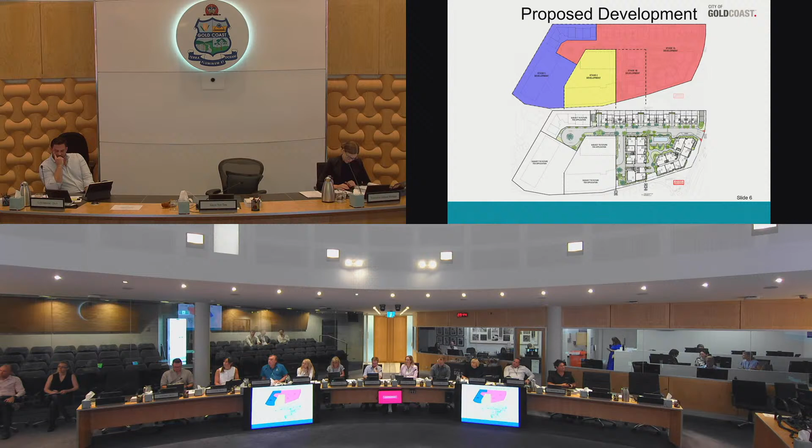The applicant has proposed a building height that is in accordance with the plan of development, as demonstrated within these figures, which show a 2-storey building height to the north, 8 storeys where it is adjacent to Robina Town Centre Drive, and 12 storeys within the southern portion of the site.

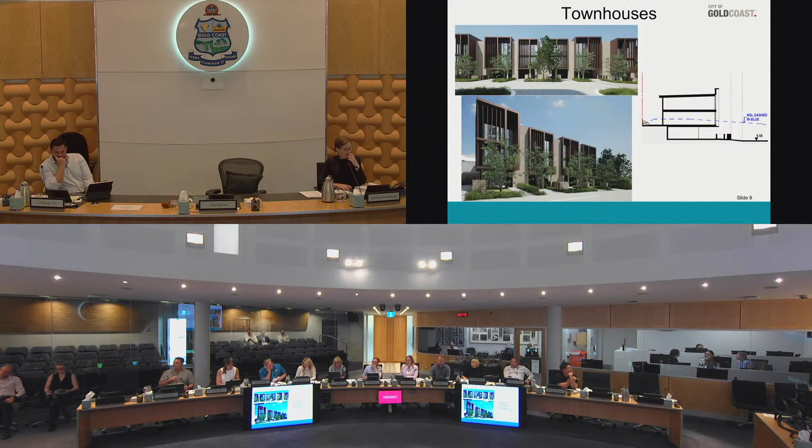The development proposes 14 times 3-bedroom townhouses along the northern boundary, each provided with 2 parking spaces. Officers note that while these appear as 3 storeys internally, they are technically 2 storeys due to the natural ground level, and appear as 2 storeys when viewed from the north, as demonstrated through the figure shown on the right, with the northern boundary on the left-hand side of that figure.

The development proposes 161 units within 2 tower forms consisting of 8 and 12 storeys. These figures show the proposed tower forms when viewed from the future open space lot and from the Robina Town Centre Drive frontage, with the townhouses shown on the right-hand side.

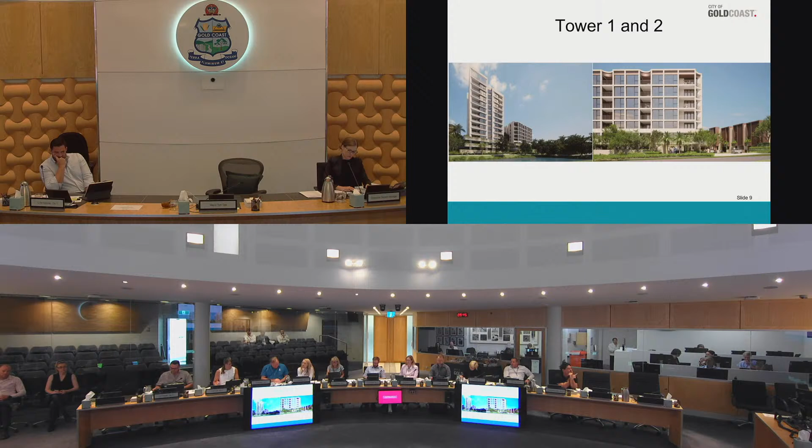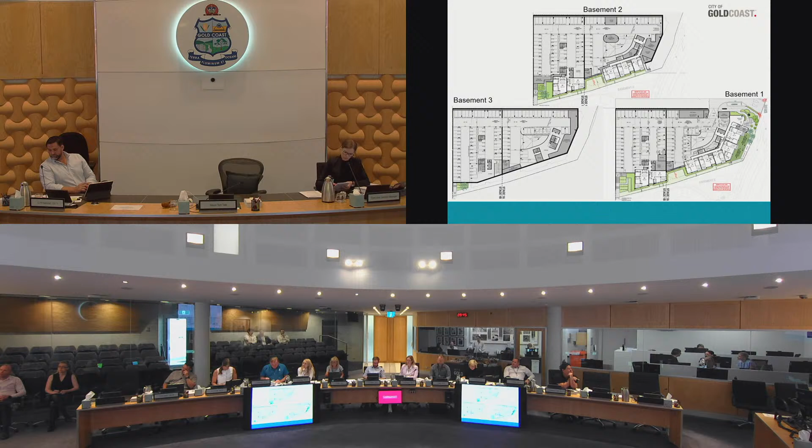3 levels of basement are proposed for the tower forms, consisting of 205 resident spaces and 21 visitor spaces. Officers note that within the approved plan of development, the applicable car parking rates are taken from the current version of the city plan, and that the development achieves compliance with these parking rates.

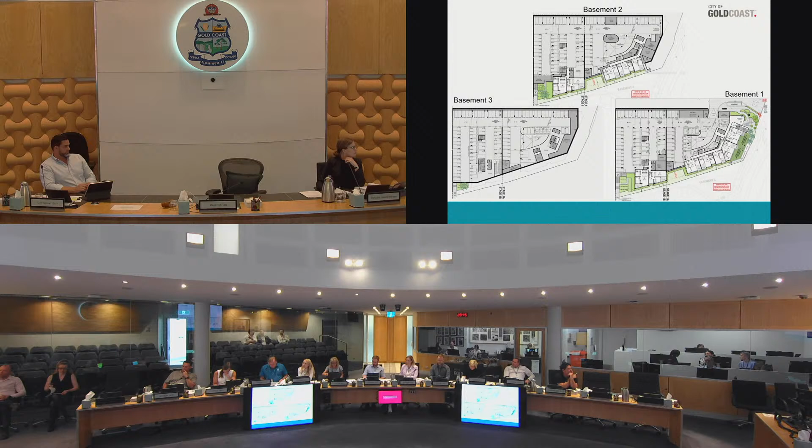Communal open space for the units is provided on the ground floor in the form of a pool and recreational areas. The tower levels contain a mix of 1, 2 and 3 bedroom units, with each unit containing its own balcony.

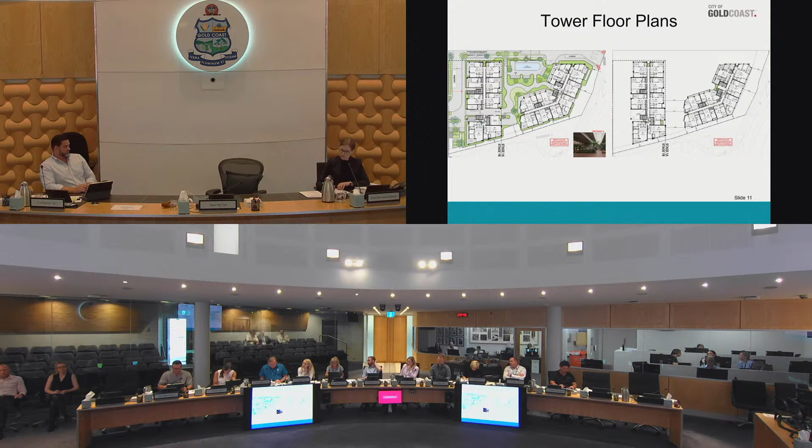The development proposes to achieve compliance with the plan of development for density, building height, site cover, plot ratio and car parking, noting that there are future stages proposed on the subject site. It is, however, noted that the development does not comply with the POD for the front and side setbacks.

While this does not comply with the plan of development, clause 5.7 of the plan of development allows council to approve the development despite the non-compliance, having regard to the amenity of the surrounding area and the nature of the proposed use. I'll just go through each of those setback non-compliances.

So to the Robina Town Centre Drive frontage, the POD prescribes...

Excuse me, sorry, would you mind just going back and repeating that? I just missed it. Sorry, was that just the last part of that?

The plan of development affords a clause that allows council to approve a development despite any non-compliance with the plan of development, which has a list of items that council needs to respond to. Relevant to the setbacks are the amenity of the surrounding area and the nature of the proposed use.

To the Robina Town Centre Drive frontage, the POD prescribes an 8-metre setback. While the majority of the built form achieves this, there are a number of minor encroachments generally limited to services required to be on or in close proximity to the frontage, such as a water meter, booster cabinet and substation, and a small portion of the building form which includes a mail room. In this regard, officers are satisfied that the proposal still provides a positive interface with the streetscape, despite the encroachments, and that the nature of the encroachments are typical for residential developments, and that this still allows for a good amenity outcome for landscaping to the frontage.

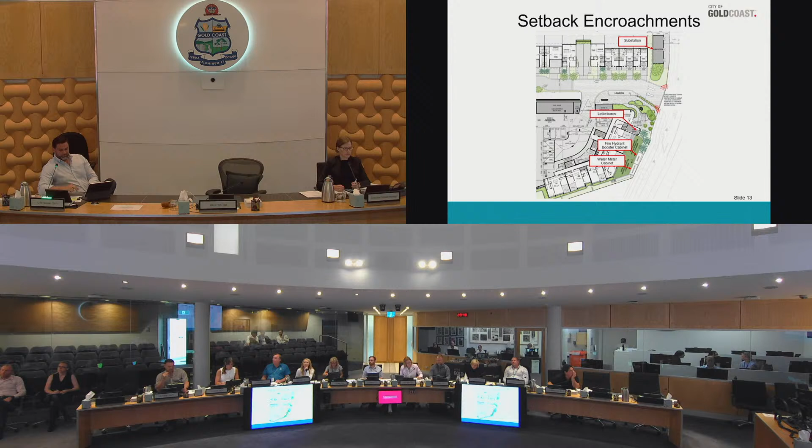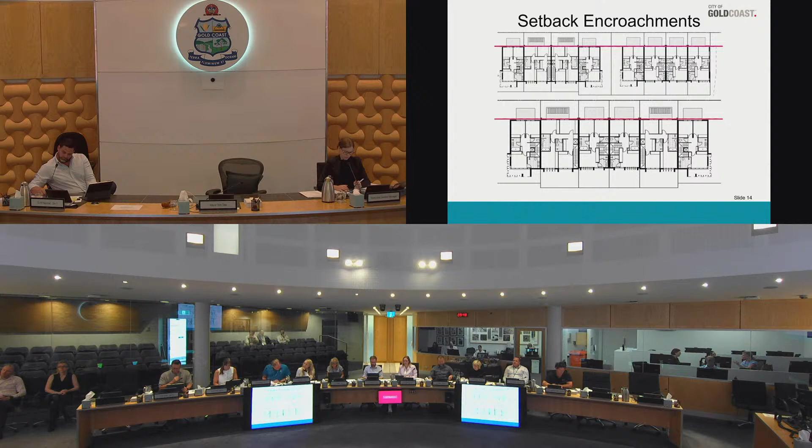To the north, the townhouses include outdoor patios on the ground floor that encroach on the prescribed 4-metre side setback. Despite this encroachment, the patios maintain a 1.5 metre setback to the northern boundary, which still allows for a sufficient landscape buffer to the adjoining residents, and the lightweight nature of the patios will not result in an imposition on the visual amenity of the adjoining residents.

To the south, the lower levels of the tower include a podium planter, which encroaches on the prescribed 3-metre setback to the adjoining future public open space lot. Despite the encroachment, the planter has provided an improved amenity outcome for the future residents and for the future users of the public open space.

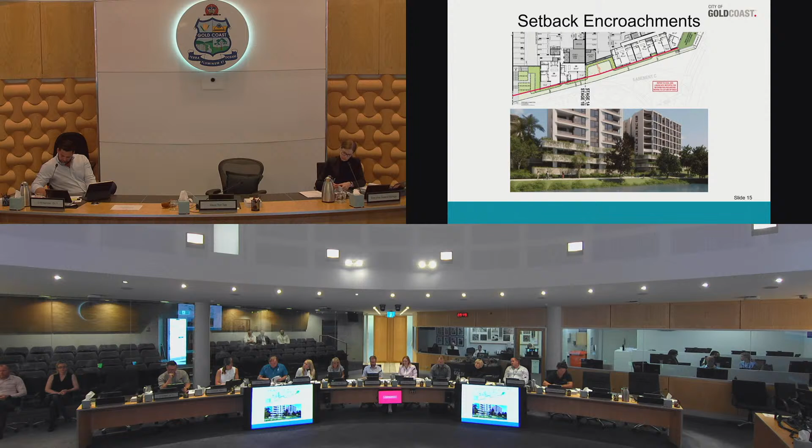Overall, officers have determined that the proposal complies with the provisions of the plan of development, with the exception of setbacks, which is considered appropriate given the nature of the proposed use and the impact on the amenity of the surrounding area. In that regard, officers recommend approval. Are there any questions?

Questions? Councillor Patterson and then Councillor Young. Thank you, through you, Chair.

On page 60, I'll just go back to it. Page 60 and 61. Given the conversation we've just had about parking, could you please clarify for me, with those images we've got there, if someone were to park in front of their garage, do they have sufficient room to do that without impacting on the footpath?

Through the chair to the councillor: each townhouse is provided with 2 parking spaces. A number of those are tandem, with cars parked in front of the garage. For those units, there is sufficient room for that tandem car park to be in front of the garage. For the remainder of the units, they are generally sufficiently set back from the roadway. It's noted, however, that's an internal roadway and won't be a council road, so I don't think they'd be subject to the same infringement notices just discussed - no, that would come under the body corporate to police.

Thank you, if I can just follow up on that. For example, this TH05 on page 60 - is that 60? Yeah. Just so that I understand, you've got a garage there. If they were to park in front of that garage, are you saying that there's sufficient space for them to park there and still have access to the footpath? Is that correct? Through the chair, that's correct.

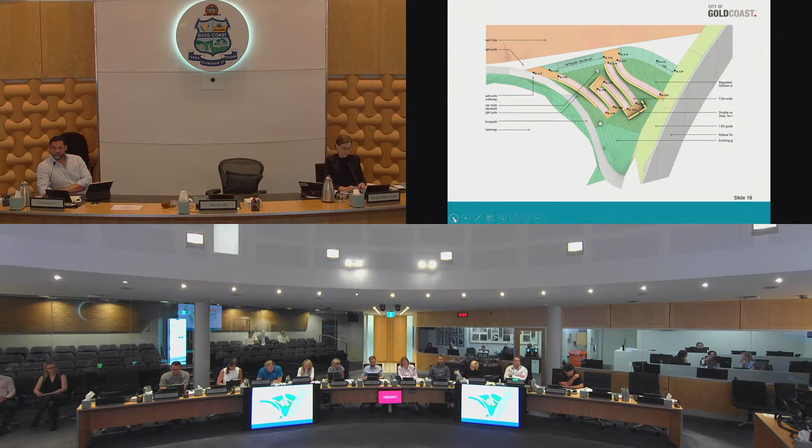Can I ask first, there was a slide that had the car parking ratios, how many car parks or visitor car parks there were. Right, so that's under the POD, the amount of approved resident car parks, and the amount of approved visitor car parks.

Councillor Doran, I will come back to you for your motion. I'll just run through questions first. Councillor Gates, well, my question actually relates to Councillor Doran wanting to move a refusal.

Through you, Chairman, can I ask the officers, there's a part in the report that suggests Council can only refuse it if it conflicts with the planning intent of Part 2 of the RCPA, or doesn't comply with the conditions of the plan of development. I don't know what those conditions are or whether it does or doesn't comply, and I would need to know that before I decide whether to support Councillor Doran or not.

So there might be the right opportunity for Councillor Doran to put forward his motion, and then we can seek that advice from officers. Councillor Doran, do you have a motion with this chamber staff? I do.

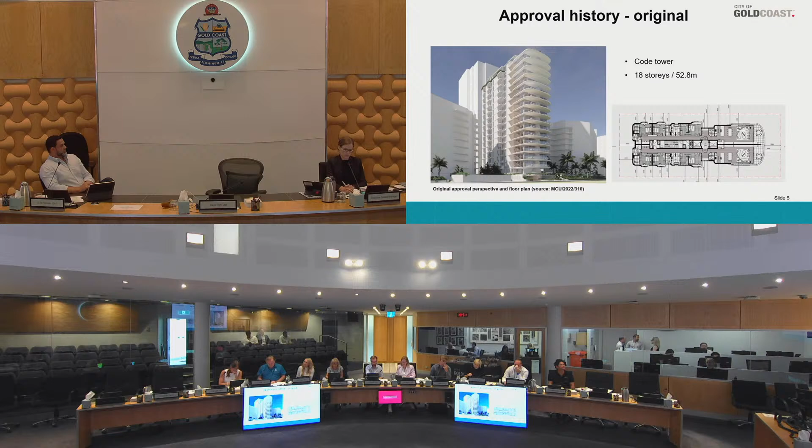In July 2024, a minor change was approved to the code tower. The key changes related to an amended tower design, including amended side setbacks of 3.1 to 4.5 metres, reconfiguration of the ground floor and communal open space, and 3 additional car parking spaces.

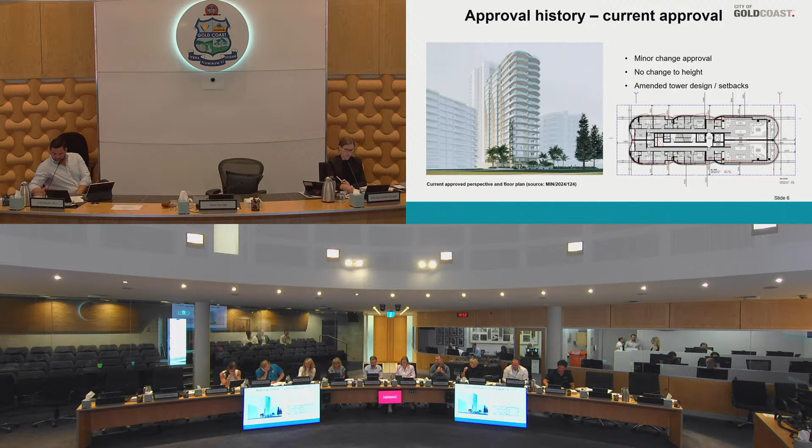This change request seeks to increase the building height from 52.8 metres and 18 stories to 71.48 metres and 23 stories, triggering impact assessment as the development will exceed the code mapped height of 53 metres. As shown in the slide, the development proposes to retain the general layout and appearance of the approved code tower.

The development will maintain the approved side setbacks of 3.1 to 4.5 metres, tower-based site cover of 71%, tower site cover of 53%, and 74 parking spaces comprising 68 resident spaces and 6 visitor spaces. Waste collection will continue to occur on-street, consistent with other towers along the Esplanade.

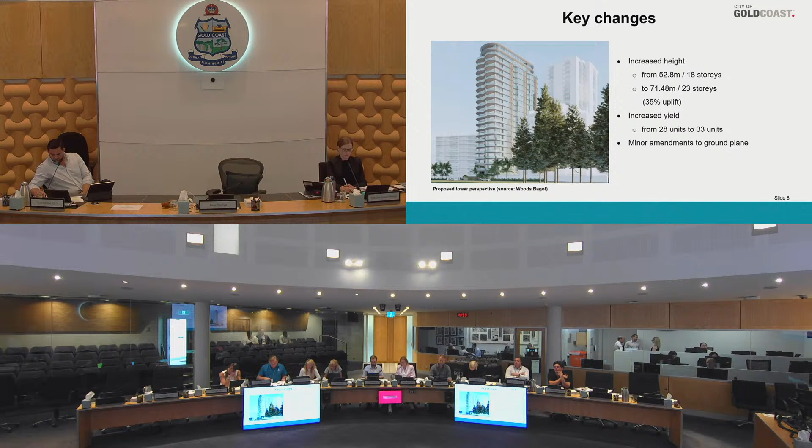Vehicle access is located on the southern side, where the service vehicle standing area is identified. While one visitor space is located at the ground floor, the remaining are located within the basement. Deep planting areas at the site's frontage and planters at the northern side will accommodate a range of landscaping embellishments. The communal recreation area is located at the northern side and required services are located at the southern side.

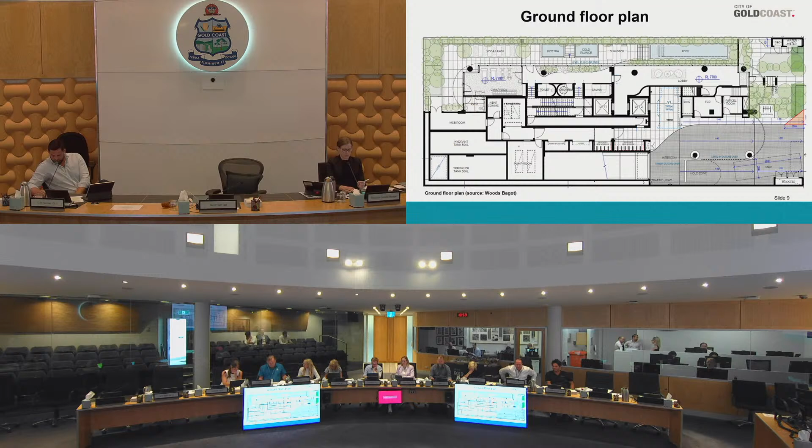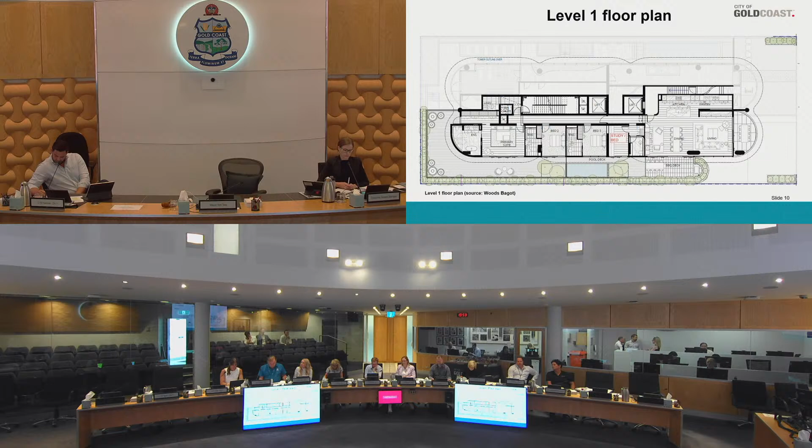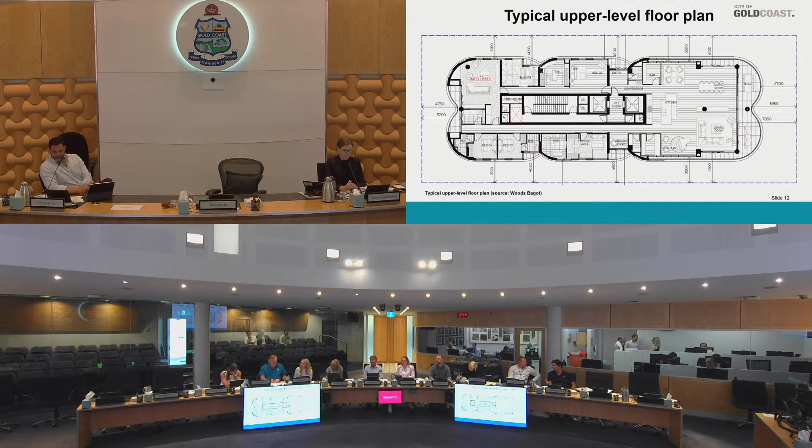During public notification, 17 submissions were received. 15 were properly made and 2 were not properly made. 10 of these were received from the western adjoining Sandbar Tower, 1 was received from the northern adjoining Mediterranean Resort, and 2 were received from the southern adjoining Sol Namara apartments.

The key matters raised were height, ocean view obstructions for the Sandbar Tower, amenity impacts, shadowing, density and traffic, and that the change sought was a minor change rather than the required other change. Officers are satisfied the proposal has addressed these concerns in relation to compliance with the city plan benchmarks.

A key consideration of the application was building height, where the proposal seeks a 35% uplift above the code height of 53 metres.

City officers are satisfied that the proposed development complies with specific outcome 3.3.2.19 of the urban neighbourhoods element, which allows for the 50% increase in building height where the applicable criteria is met. The proposal reinforces the local identity.

There are several developments in the local area which are above 53 metres, including the western adjoining Sandbar Tower, which is 82 metres in height.

The proposal achieves a well-managed interface. It achieves appropriate building separation, includes privacy mechanisms, and provides a well-modulated facade.

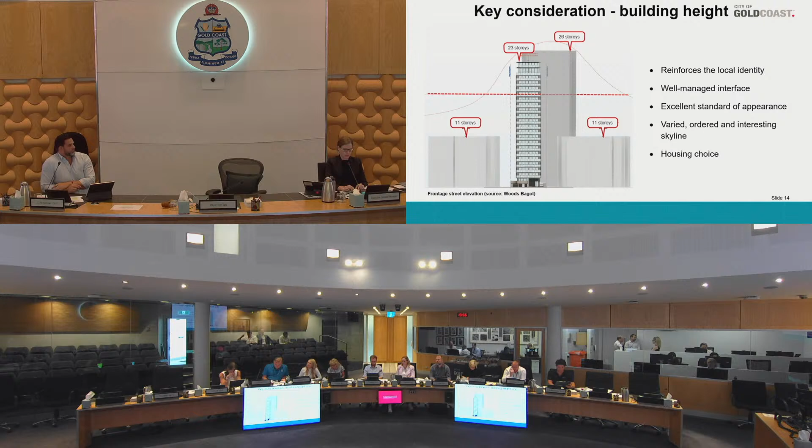Officers are also supportive of the height and setbacks as the proposal is responsive to the specific site circumstances. The site is adjoined by 3 larger allotments, all greater than 2,500 square metres and subject to established development.

These building separations are commensurate to the scale of the relevant buildings, ensuring the development achieves a sense of openness around the buildings and allows for reasonable outlooks, natural light and ventilation. Therefore, the development is considered to maintain the appropriate level of amenity for adjoining residents expected within the high-density zone.

Officers therefore recommend the application be approved subject to conditions. Are there any questions?

Could I seek clarity on the matters raised by submitters? You mentioned, was it suggested that they thought it should have been a minor change instead of another change? Did I hear that incorrectly? Yeah, that's right, I think there was some confusion on the application type. But for all intents and purposes, the assessment would have been the same, but under the other change, there's public notification rights, which they were afforded. Correct. Okay.

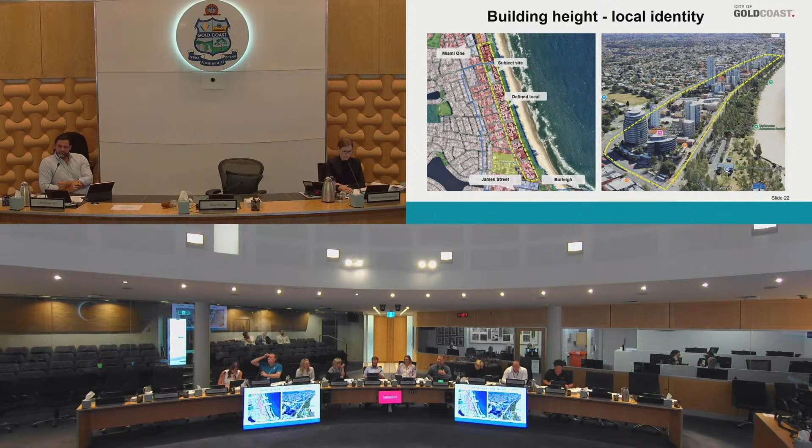Chair, I noticed in the report, and I think it's relevant to all councillors because we're getting more boundary planter boxes, and I noticed it in the Robina application. There was talk of a specific condition around management plans for planter boxes, but I wonder if you could elaborate on what that means in terms of not burdening the neighbours, or if there's a plan to service boundary planters at zero setback.

Through the chair, is that in terms of the maintenance of the planters? Yes, so it's essentially just so that the body corporate maintains those and ensures their viability. Okay, so it doesn't outline how they get over fences, or how they work with neighbouring access or anything like that—it's just that they must maintain, so we end up with green spaces.

Through the chair, that's generally something that landscape assessment has a look at. In this circumstance, all the planters are quite accessible. Other developments, where it's a bit more difficult, we do request that information and detail how those planters are maintained.

Chair, and probably the final one is landscaping. I noticed there's a great opportunity for deep planting at the front of the building, but noting there's no ability for street trees along the Esplanade and the footpath, I'm wondering how many deep plantings there are in that frontage around shade trees that we might condition.

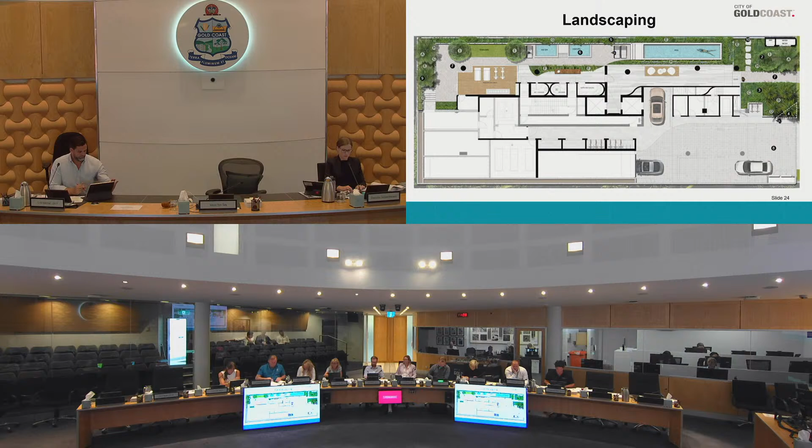Through the chair, in terms of what's currently proposed in the SLI, there is some deep planting at the site's frontage, accommodated by the basement being set back 1.7 metres, so there is natural ground for planting. In this change proposal, the services at the frontage have also been orientated 90 degrees, limiting hard stand along the frontage.

In terms of what's in the SLI, currently recommended is a canopy pandanus tree on the southern side garden bed, just south of the pedestrian entrance, and on the northern side bed a frangipani tree as well as a cabbage palm. Thank you, Chair, I might yield.

I had a couple first, and I'll come to Councillor Doran. Do you have shadow impact diagrams in the presentation? Through the chair, I do.

The other question I had was regarding visitor arrangements. There's been a couple applications recently where we've included requirements that when visitor car parking is in the basement, there be signage up front and a lighting system to tell people if there's a visitor bay available, or a loop system. Have we included that in this one?